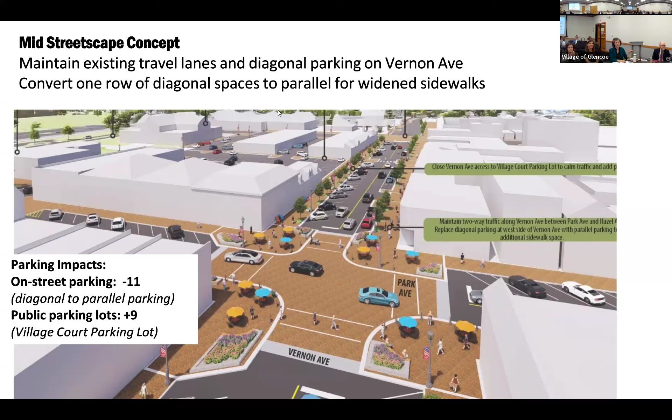It also calms traffic, and now we have those cars coming out and making the turn. As far as parking impacts overall, going from a diagonal to a parallel parking system, we would lose 11 spaces, but we would be gaining that back by closing this access, so it will be a net-neutral change.

Then the next one, the last one. Back to it. Very nice.

Thank you. So this one would be the most change, and this is what we call the max concept. In this case, we would keep our diagonal parking spaces on both sides of the street, but instead of a two-lane roadway, this would be a one-way system, with a one-way drive lane and diagonal parking on each side. That also gets us a similarly sized sidewalk, in this case a 17-foot sidewalk, which will allow for outdoor seating and dining. It would look something like this: a one-way southbound drive down Vernon with diagonal parking on each side, and wide 17-foot sidewalks.

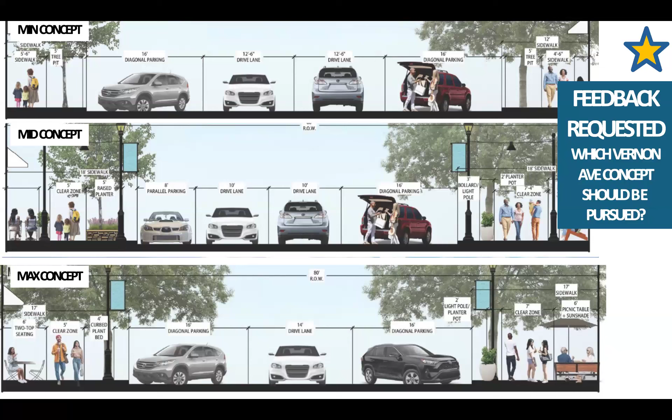And then we asked folks to help us think through what existing streetscape materials and products should be protected and reused. So you can see how things are here.

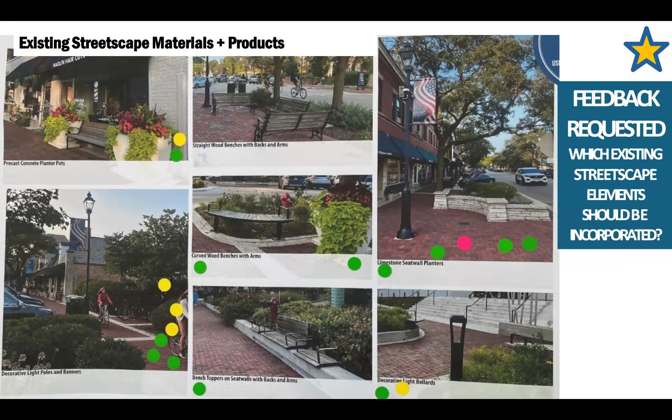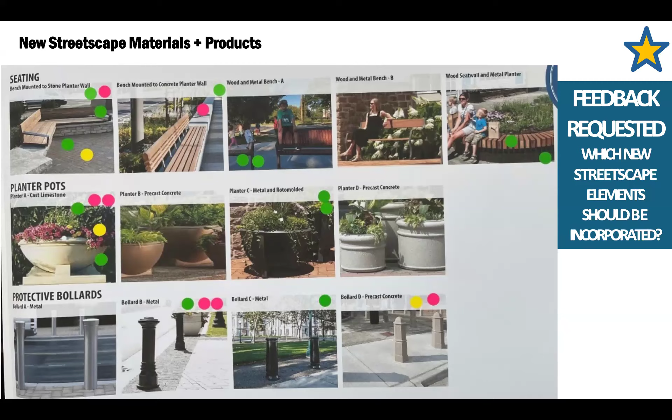As far as where we're at in our process, we are scoped out for tonight to get feedback, and then to go develop the draft streetscape concept plan before going back to the village board. But we did want to take this time to get your feedback, and also thinking about outreach, how important the project is, and that we got great feedback, but it was limited in the number of people that were meeting. Would we like to consider having additional outreach? It could be in the form of an online survey, or these same materials put online so it's consistent. So that is the first question. I'll just take a pause there for your thoughts.

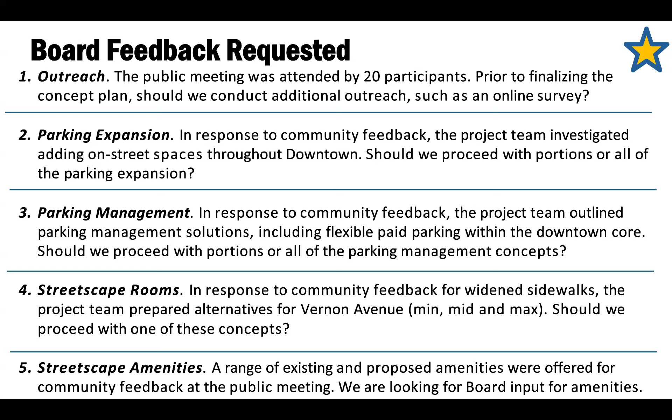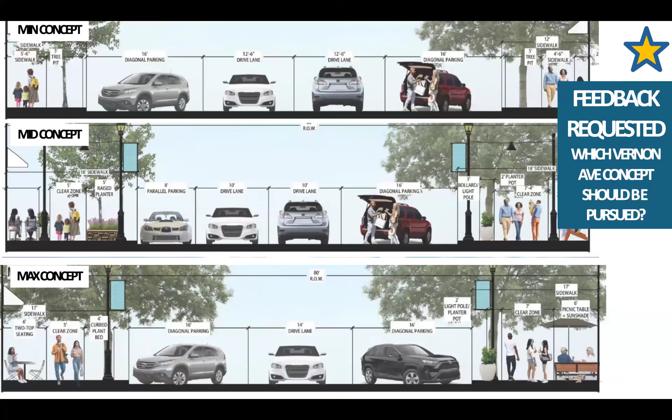One thing we've seen out there today is that because the travel lanes are so wide, we have people making left turns instead of basically on the other side of the street when people make left turns. So we are aiming to make this more pedestrian friendly by reducing travel lanes, and also enhancing the intersections - these could be raised so that it also slows traffic. So when you're coming along from the north, for instance, and you get to the intersection, the pavement would raise up a little bit, with a bit of texture because the pavement changes. All of these things together force folks to drive slower, which is what we want in a corridor like this, so from the get-go they'll be moving through the corridor slower.

Not having that big wide space to speed through - I think having slower traffic is going to help give people pause so that people can make their parallel parking space, but do you want to answer that? I would say two things. One, I think it's okay with slow traffic a little bit, because that's sort of the goal of this program - it's okay if someone has to wait. No, parking has to come.

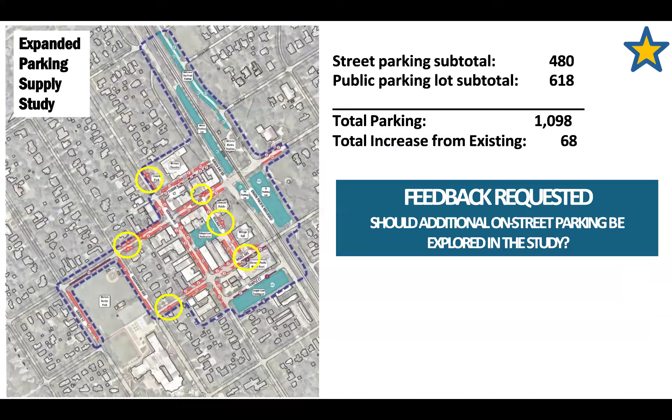Yeah, the idea is that we're providing more spaces for people to congregate together. It doesn't necessarily have to be dining—seating, planters, places for people together, not really tied to a restaurant. We heard good feedback from past projects where people appreciate having an outdoor space; they don't have to patronize a business to use this public space. In the future, you never know—this is setting up infrastructure for maybe someday somebody does want to occupy that.

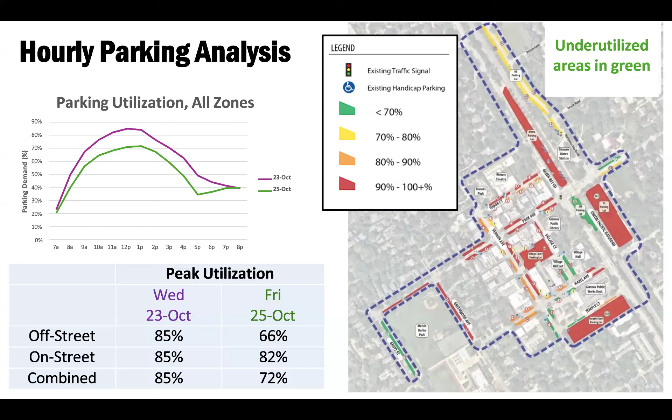The thing we're recommending is there's a wall with kind of landscape around the parking lot here that could be enhanced with plantings. This really is the entry gateway into the community, so we've got this opportunity to landscape it.

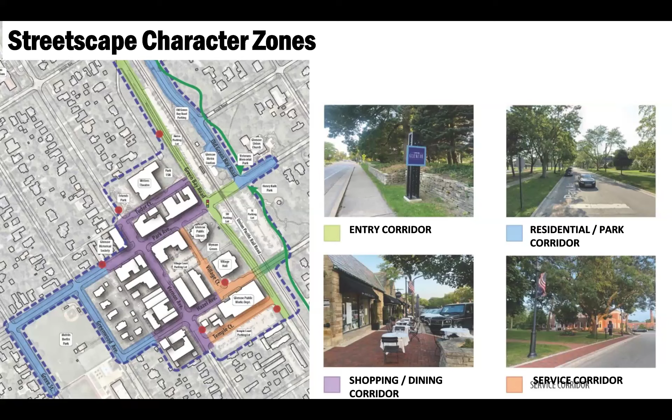We can narrow the street here also and make it wider for the multi-use path in this area, so that instead of just a sidewalk that's fairly narrow and feels like it's right up against the street, you could have a landscaped parkway between the sidewalk and the curb, with landscaping and signage. So it really feels like it's part of the downtown. Right now you kind of feel like you're in the same zone - you're just downtown - but once you get to the trail, it's like you're in a really nice environment. We want to expand the feel of downtown into that area, which will also help drive usage.

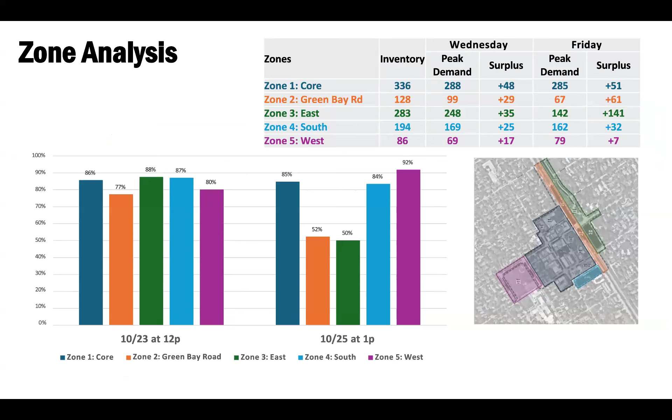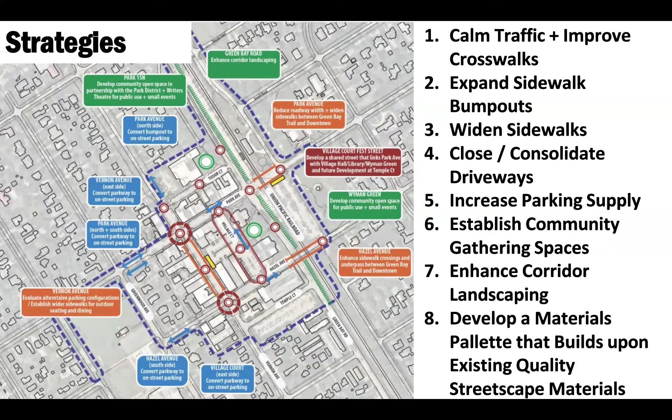Yeah, 16 foot is the standard. I can't predict how big they'll get. It's not original. Definitely, but it is sort of the standard that you use. The problem with going much bigger is you're sort of wasting the space.

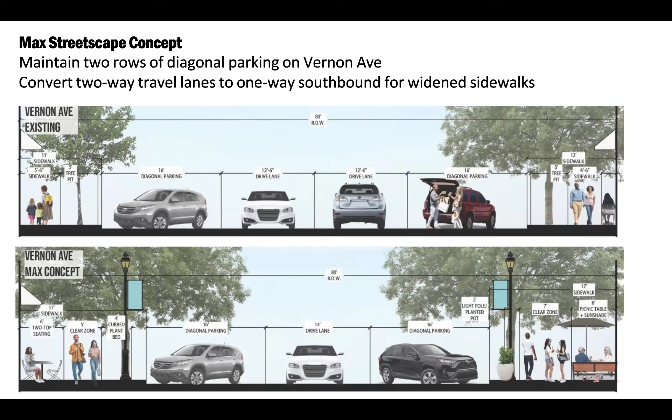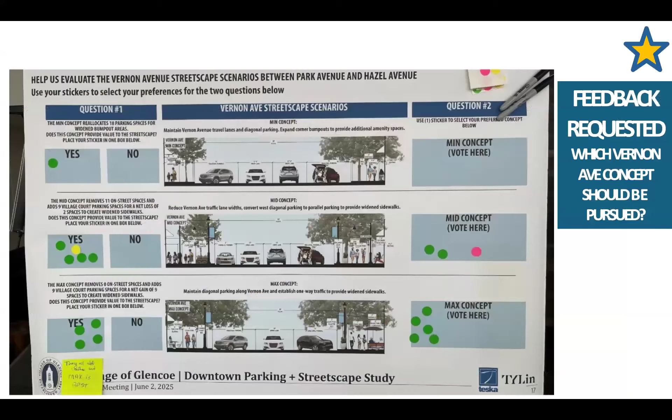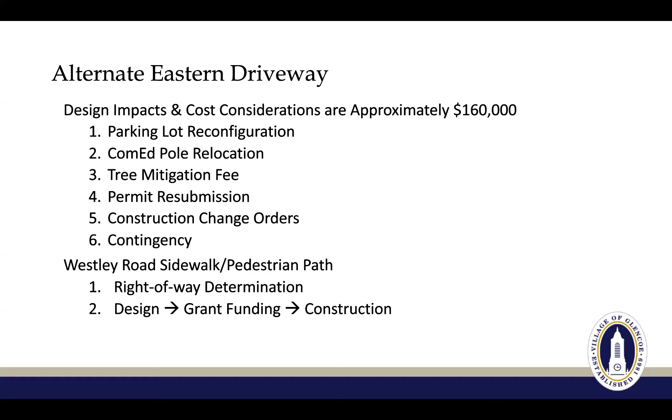Thank you. Thank you, and you don't go anywhere. So, yeah.

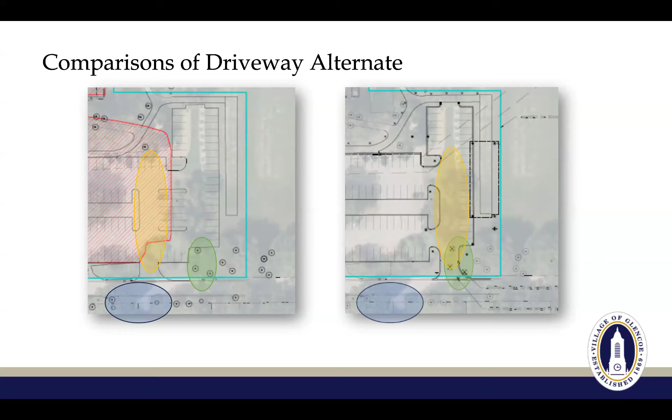One question is, why are we moving the entrance from where it is now? That was my one basic question. Why are we, why are we? That's a great question. Do you want to answer? No, I just don't.

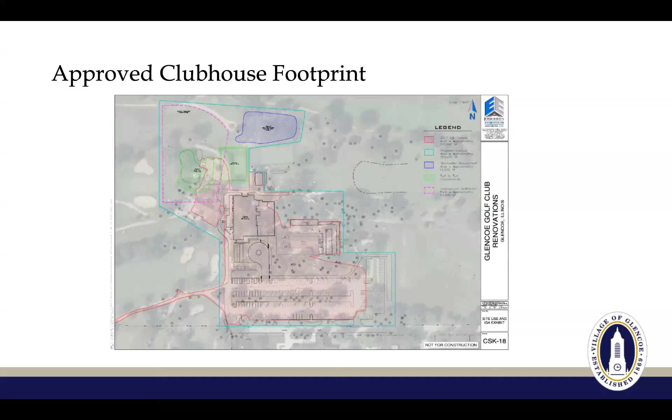We're going to try to move through this somewhat quickly. This is really just a staff update on an ongoing new issue that continues to evolve with the community. The Deputy Chief is on Zoom and will walk through a few slides, giving a high-level overview. At the end of the presentation we'll get feedback on potential future next steps at the local level. Andy, are you hanging in there?

I'm here, can you hear me? Hopefully you can hear me. You guys are cutting in and out a little bit.

Electric scooters and electric bikes have been rapidly gaining in popularity, particularly among students and younger residents within the village. We want to provide the board with a review of the current legal framework and information.

Andy, hold on. Try that, how about now? Is this better now? Not much. All right, we're gonna have to let this go. We'll kind of jump ahead.

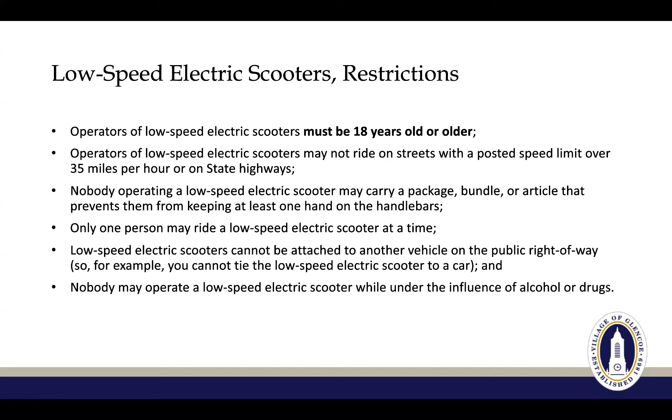I'd like to jump ahead to the electric bikes. Go to the next one, please. There's one more, please, thank you.

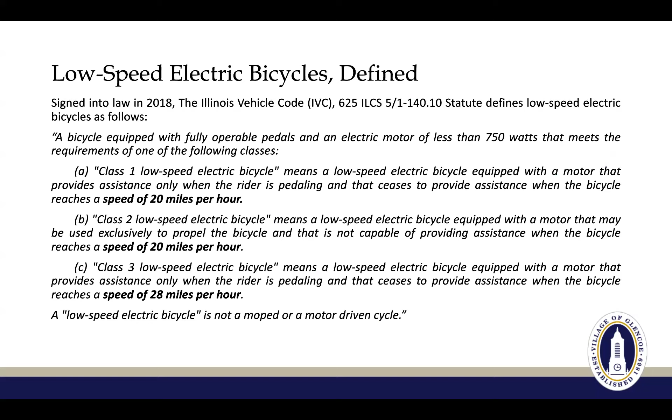What we have undertaken in this community over the last six or so months is a pretty comprehensive outreach and information sharing plan throughout the community. In particular, we've tied up a strong partnership with District 35 in sharing information about these scooters — about who should be using them, how they should be used, and importantly, who shouldn't be using them.

Public safety has taken a pretty active role. There have been information blasts shared with parents, handouts placed on handlebars of these scooters as they've been parked outside our schools, and face-to-face discussions between our officers and kids throughout the community.

Generally those efforts have been a primary focus, but there's also been a lot of regional discussion, taking place among police chiefs along the North Shore. We've been focused on that along with our village attorneys on understanding the statute. What we're starting to see is that a number of our North Shore neighbors are beginning the process of implementing a variety of local ordinance modifications to address how e-scooters and e-bikes are used in their community.